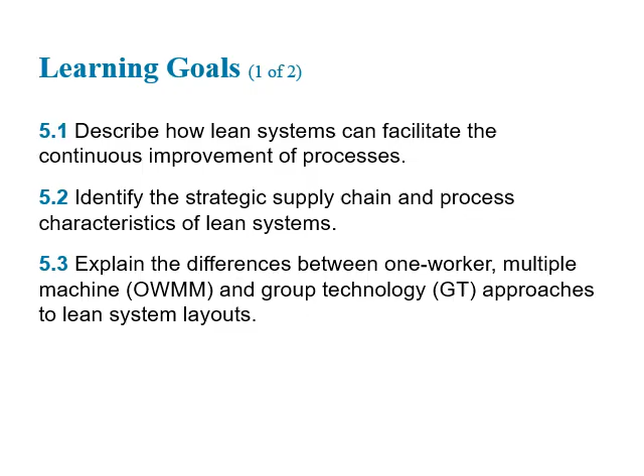It spans all of what you're doing in operations, everything from your strategic perspectives on customers and your way of organizing your shop floor, if there is a shop floor, your way of using employees to make improvements, and all the way down to things like order quantities and how you schedule and so on. A real common focus in lean is to eliminate waste, and waste reduction is a big issue. So anyway, let's jump into it.

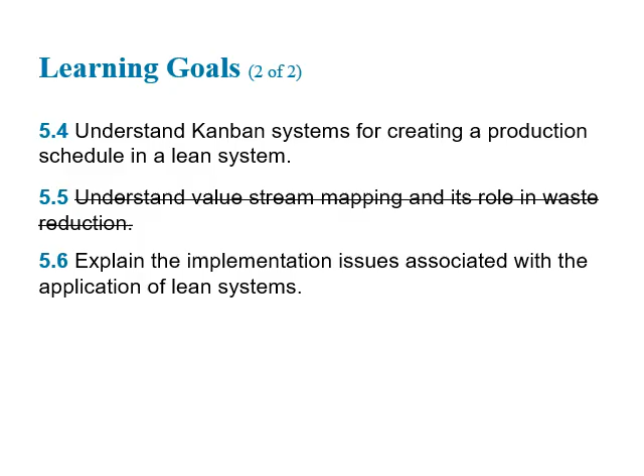Your book says that lean systems are operation systems that maximize value added by each of the company's activities by removing waste and delays from them. Delay would be a form of waste. So when we say value, we're really talking about something that a customer considers value.

When you go to the grocery store and you check out, it seems like the natural thing to do is for the person at the register to put the items that you bought in a bag. Well, if you can carry that without a bag and you don't value the bag, in fact, you think the bag is something you're going to have to deal with when you get home, then the approach of lean would be to not require you to take the bag, right? Because you don't think that's valuable.

In fact, if we found that none of our customers actually valued having a bag, then we would get rid of the whole aspect of having a bag for groceries. It's a simple, silly example, but you get the idea.

To give you another example, you go through the drive-thru at Chick-fil-A, it's summertime, you want a peach shake, or it's wintertime and you want, what do they have in the winter? Peppermint shake, something like that. Yeah, pretty good stuff. Anyway, in my experience, they're going to ask if I want a cherry.

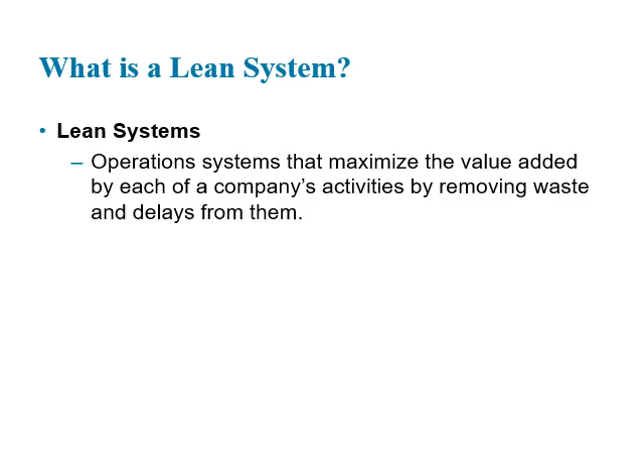Another thing that might have us thinking in terms of manufacturing is the fact that the whole idea of lean grew out of something called just-in-time production. Another word for just-in-time production is the Toyota production system, because that's where it came from, and that's the classic full-blown implementation of what JIT is, and it's the source of the lean philosophy and what we mean when we talk about lean systems.

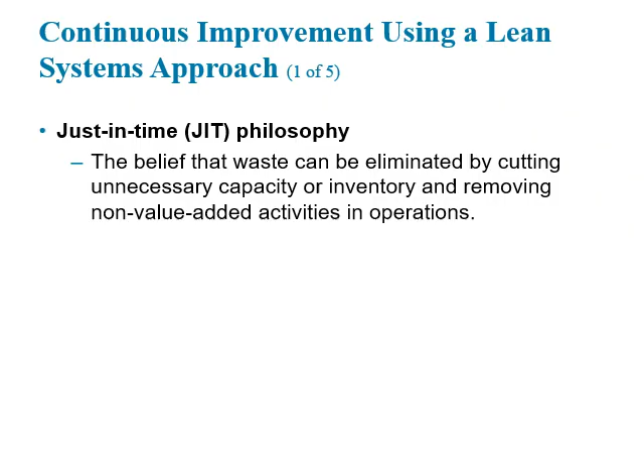So the JIT philosophy is basically the belief that waste can be eliminated by cutting unnecessary inventory or capacity and removing non-value added activities in operations. The folks at Toyota that developed this JIT approach and their colleagues in their supply chains identified 8 common types of waste that they would try to eliminate.

So the Japanese word for waste is muda. Muda is what we're trying to eliminate. First was overproduction. That's making components or parts or items before they're needed. What happens if we make something before it's needed is it sits around for a while and we don't know that we created problems.

So let's make it simple. We're a bakery and we're baking cakes for our customers, and they're going to show up through the week, and we bake on Sunday and they eat cakes through the week.

Well, sooner or later, a customer comes in and says, your icing was really kind of grainy, and as a result, I thought the cake was not really what we needed for our setting. Well, it's been days since you made the cake. You don't know why that icing is grainy. If you made cakes a few hours ahead of time, then you'd be very quickly able to respond.

And in the meantime, you've got 4 days worth of cakes still sitting there that you haven't sold, and you got to go figure out which of these have the grainy icing. Did they all have grainy icing? I have customers that are never going to come back. So overproduction.

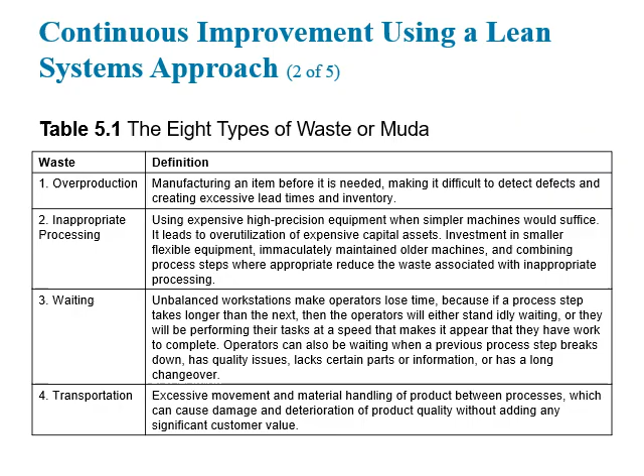Motion, needless motion. If your workers are going home at the end of the day just completely exhausted, it might be because the jobs are designed in such a way that they have to do a lot that they wouldn't need to be doing. So extra bending, stretching, reaching, lifting, walking, excessive motion could be a form of waste to be eliminated.

Inventory gets a lot of the attention. Like we've said, with overproduction, excess inventory hides problems on a shop floor. Plus, you got to pay to heat or cool the space where it is in a lot of cases. It can increase lead time just simply because it's in the way. And so there are a lot of problems associated with having too much inventory. Obviously, inventory is helpful. We're going to need some, but we can't have too much.

Defects are obviously a waste. If you spend time making something and it has no economic value, then you've wasted your time. Or if it has some economic value but requires further processing like rework to make it have that value, again, you've wasted your time. Or if because you make defects, you've got to have inspectors, that's a waste. So lots of ways to think about defects as wasteful.

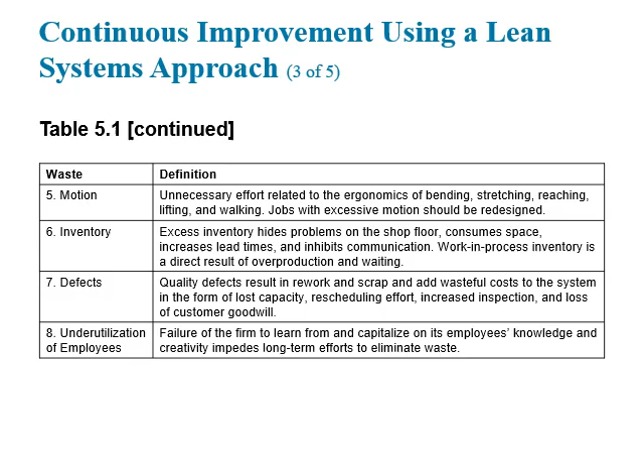A really common metaphor that we use when we're thinking about lean systems is the analogy of the river and the rocks, or the water and the rocks. In this analogy, the water is inventory. And like I said a few slides back, inventory can really help us to operate our systems. If we have a strike at a supplier and we have inventory, that's no problem at all.

If we have bad parts shipped from a supplier or made in our facilities and we have inventory, we can just put it aside, get a good one, and keep on going. So inventory is something that helps us to operate our system even when there are problems embedded in the system, disruptions of any kind, whether they're quality related or related to overt acts by employees or poor scheduling or whatever. All of those things can be accommodated if we have inventory, and we might still meet our schedules.

However, in this analogy, there's not just water, there are also rocks. And so the rocks are the disruptions, the kinds of things that we've been talking about. If you have a lot of inventory, you may have very little information about the rocks. You may never see the rocks. And as a result, you're unlikely to remove the rocks, which are obviously waste.

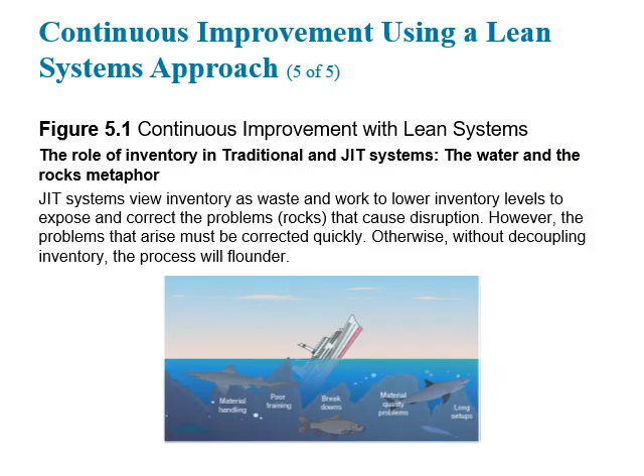So from a lean perspective, you don't want to have too much of the water, but just being realistic, you can have too little water and not get your boat down the river or not get your orders to customers. The good thing that inventory does for us is it decouples an operation from another operation, and thus it gives us insulation from problems that occur elsewhere. So we've got to have some inventory to protect us.

In the news these days, we frequently hear about situations where manufacturers are having to shut down. For example, in the early months of 2021, we see auto manufacturers with a shortage of chips having to shut down. And so, if they had enough inventory, perhaps they could continue to manufacture. There's this balance that we talk about. If we're going to be lean in regard to inventory, we're probably going to need to make some changes in terms of a lot of things, and that's why we call this lean systems, and we're looking at this from a systems perspective.

For example, if we're an auto manufacturer operating under this lean philosophy, and we have a plant where a unionized workforce is disgruntled, they decide to go on strike. Maybe what they made was steering wheels. We don't have any steering wheels. We don't need any of the other parts that go into the car, and the whole assembly line and the whole supply chain really gets shut down. So the employees have a lot of leverage there. Well, our approach to employees better be different than the normal adversarial approach that we might have seen in the past, or we're going to end up with a serious business problem whenever there's a minor labor problem.

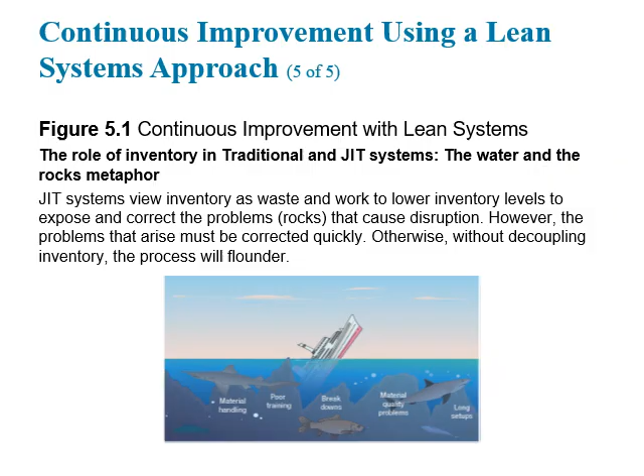Similarly, we might have a supplier that for some reason goes bankrupt. Well, we need to have a different approach than an adversarial approach to our suppliers. We need to have an approach that seeks the success of our suppliers, because we need reliable suppliers rather than having to carry inventory. So you see that this lean philosophy needs to be used and interpreted in a systematic way, in an ideal sense.

In addition to those better relationships with suppliers and employees and even potentially customers that are important in the lean system, in the just-in-time system, it's important to have small lot sizes so that you have less inventory, so that you're not doing this overproduction thing. And of course, you'll recall that a smaller lot size would require smaller setup times.

The economics that we explored when we were talking about lot sizing with the EOQ is legitimate. I mean, if it costs you a lot of money to set up to produce or to place an order, you can't be doing that every 2 hours or every hour. You need to order a good bit of inventory to justify that expense of placing the order or setting up to produce. So one important aspect of lean production and JIT systems is working to reduce setup times or setup costs.

And there's a gentleman who worked with Toyota and later the Japanese Ministry of Industry and Trade. His name was Shigeo Shingo, who made the claim in the 1960s that any setup in any industry, anywhere in the world, could be done in a matter of minutes. And so now there's this terminology called SMED, stands for Single Minute Exchange of Dies. And he's demonstrated that this is true.

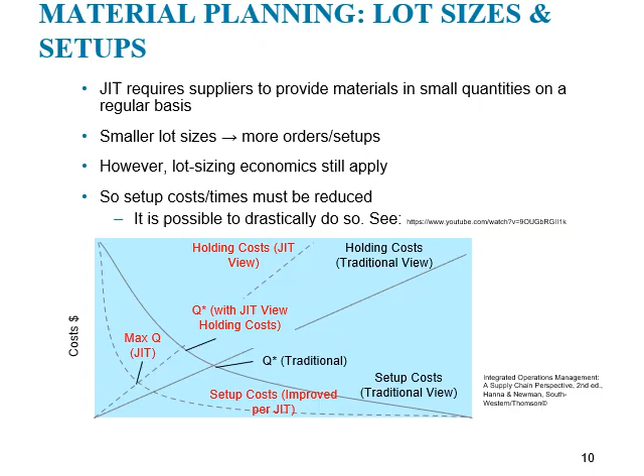So if we can do that, then we might be able to do something more like a pull method of workflow, where instead of making large batches of items and putting them on the shelf to be used as needed, we're able to see what was just recently used and replace that. So we'll talk later in this slideshow about a Kanban system that shows you how that would work in a lean scenario.

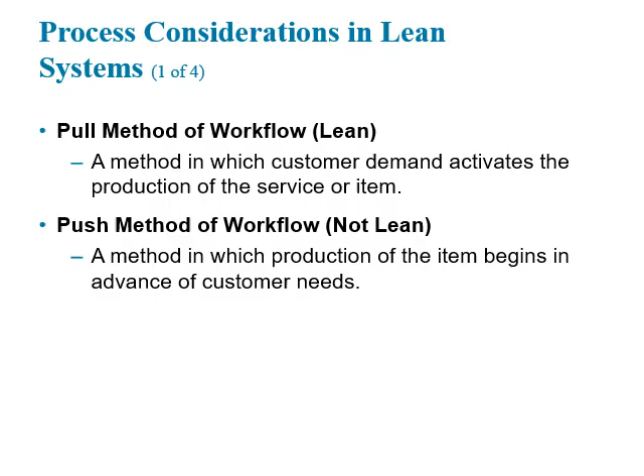Another systematic issue that's important is to make sure that quality issues are addressed at the source. So the Japanese word for this is jidoka. And what that means is when an operator or a machine senses that there's something wrong, maybe they see a defect, maybe when they're installing, let's say, a dashboard onto a car frame, it's supposed to click in place just naturally, and all of a sudden they realize they had to kind of force that to fit, and they didn't hear the click, it didn't feel right.

Then they have the opportunity to shut down the process, identify what the actual problem was, have people, because the process is shut down, come and help them solve the problem and make sure it doesn't happen again. Might even design a poka-yoke, which is a mistake-proofing device to ensure that the problem doesn't occur again. Something like that. We'll find a countermeasure that's effective in some way.

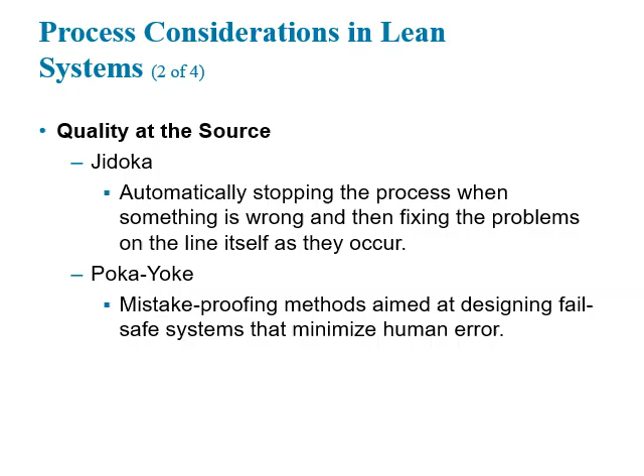So then, really what we're looking for in terms of the system from a production perspective is having uniform workstation loads operating essentially at takt time, as we described on a previous slide. And so, the idea is that the load and volume and product mix is something that is a recurring thing that's stable and even across the entire system.

It allows us to potentially even have something that we refer to as mixed model assembly, in which case, we end up with a single assembly line producing multiple items based on materials being fed from supply workstations and from external suppliers in the order in which they're needed for the assembly that is to be done next. And so that's sort of the idea that we're working toward.

And again, we don't want this unnecessary processing. So to the extent we can, we use standardized components, and if there's an off-the-shelf available component that's going to work just fine, why should we design a similar item for a specific unique application? And why should we have a special fancy machine if there's a machine off the shelf that'll work fine for our purposes? So we're trying to keep things as simple and repetitive as we possibly can.

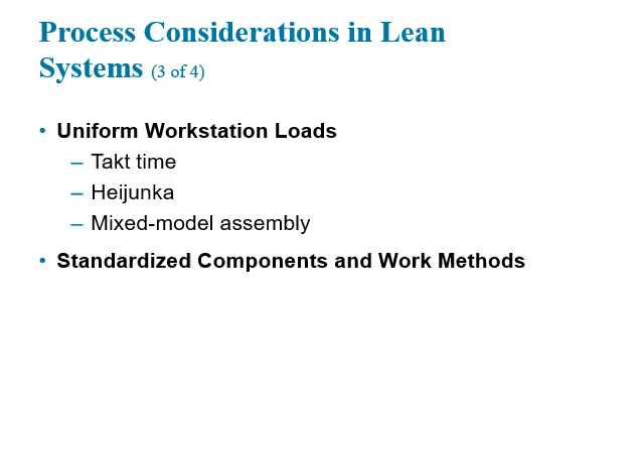5S, making sure that there's a place for everything. Everything's in its place. The workplace is clean and orderly and maintained in that regard. It's a very positive thing, very helpful in a lean system. It eliminates a lot of waste associated with disorganization.

In a lean system, automation is actually seen as a positive thing. I know there's a lot of negative baggage associated with it. If we're thinking about automation in our country, a lot of times we're thinking about losing jobs. But the other way to think about that is if there's a job a machine can do, why would we ask a person to do that? Wouldn't it be better to let the machine do that and use our employees' creativity to improve the way that we do things?

So, there's this view that we may be underutilizing, again, our employees if what we're doing is we're just paying them to do some routine task repetitively that a machine could obviously do with less fatigue and eventually fewer defects and fewer errors.

Finally, it's important for us to use something called total preventive maintenance, and actually we might even say total productive maintenance. So the idea is that all workers would have responsibility to do the basic maintenance on their equipment, but we would like to ensure that preventive maintenance is done at regular intervals, or even productive maintenance. So a machine may not be at a point where we need to do preventive maintenance to keep it from breaking down, but it might be at a point where we could perform some maintenance and it would be more productive.

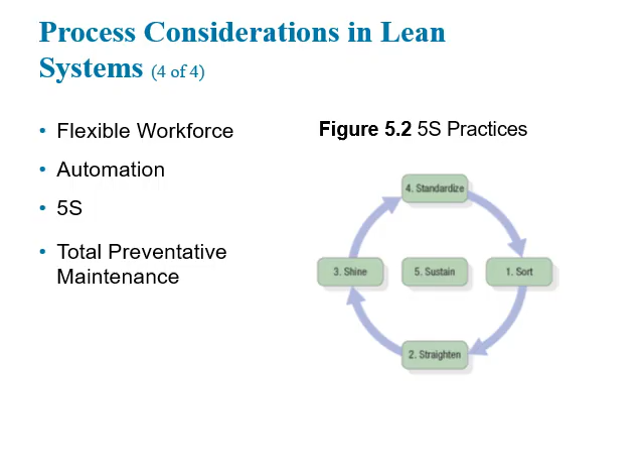And so, those are important considerations that we might think about as we consider the sort of systematic aspects of lean that will enable us to lower the water level and not have to worry as much about the rocks.

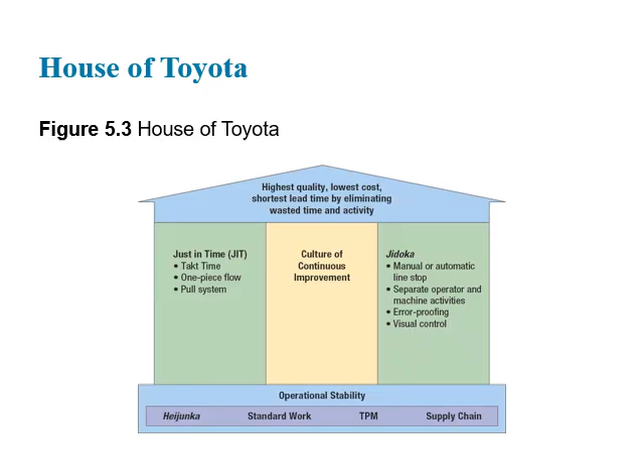So the idea of group technology is something that goes along with cellular manufacturing. And what we like to do a lot of times in order to have more flexible workers is create production cells that produce a variety of parts, but using a uniform routing. And in order to do that, we need to design the product in such a way that it can be made in the cell, and that's what group technology is talking about.

So instead of having a job shop with large lead times and large batch sizes, what we can do is we can create a cell that produces a variety of things using the same resources, but produces them in small quantities because we've designed the parts in such a way that the cell can make them. And we've designed the cell in such a way that it can make this variety of parts. Then we have a lot of flexibility.

If the cell's really busy, maybe we put 2 workers in the cell. Or if the cell's not as busy, maybe we have 1 worker and he can control all of the equipment at the same time. So this shape, the U shape, is very common when we start thinking about that manufacturing approach that we would call cellular manufacturing. And the underlying product design approach is called group technology.

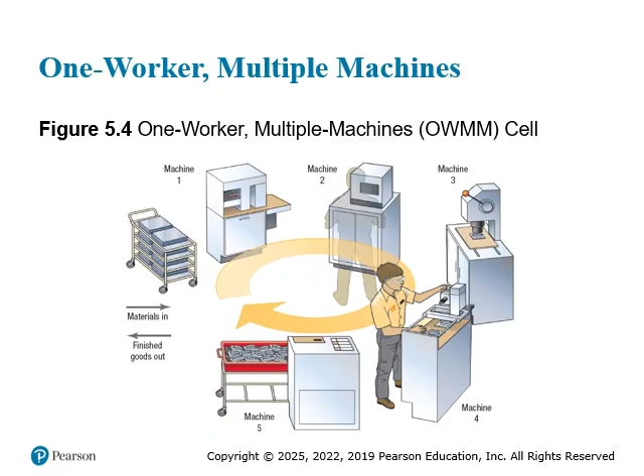Instead of having work centers like lathing, milling, drilling, grinding, and assembly completely separated, what we could do is create a job cell that has all of those resources in the cell. And that way it's capable of making the entire mix of items that are in the product group that we've designed.

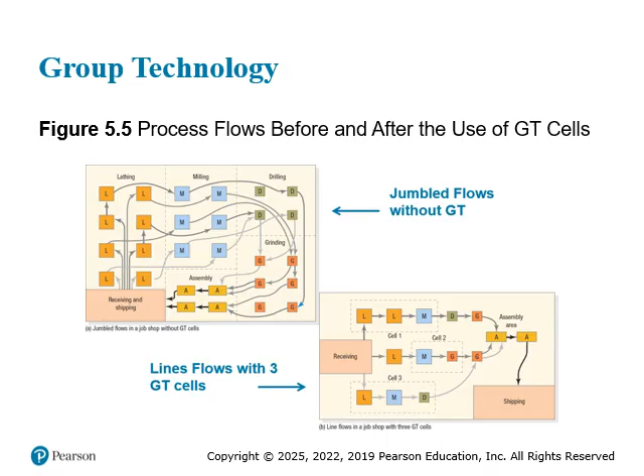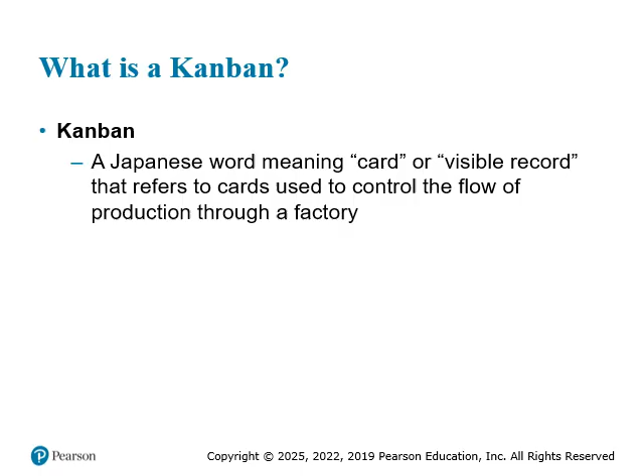Now, the last topic in this chapter we'd like to talk about is the Kanban system. Kanban is a Japanese word. It means card, like you're playing a game of rummy, you're using cards, you're using Kanbans. Another way to think about it is it's a visible record that can be used to control the flow of materials through a facility. I think it's also a Chinese word that sort of has this notion of being a poster that conveys information, something like that. Obviously, it came out of Japanese in this context.

So we could have one-card Kanban systems, two-card Kanban systems. There are a variety of different approaches. But basically, what the Kanban does is it provides authorization for someone to do something. So an empty container could be a Kanban. So here you see assembly line 1 and 2, and you see a fabrication cell. So if the assembly line sent an empty container to the fabrication cell, that could be a single card Kanban that says, fill this back up. It would need to have on the container what goes in there and how much goes in there. So the fabrication cell would simply replace what had been used by the assembly line.

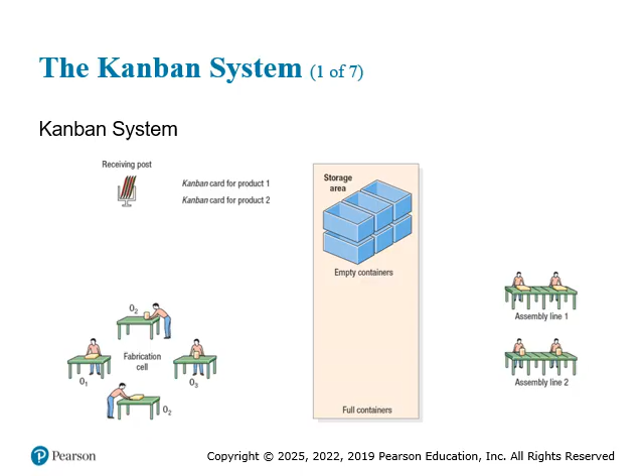It's also possible to have disposable containers like cardboard boxes or something like that, and for a card to be pulled off of the disposable container by the assembly line. And then the card goes back to the fabrication cell, indicating that they need to replace what was used by the assembly line. So the container doesn't come back in that case. The card makes its way back. You'll see it working in the next few slides.

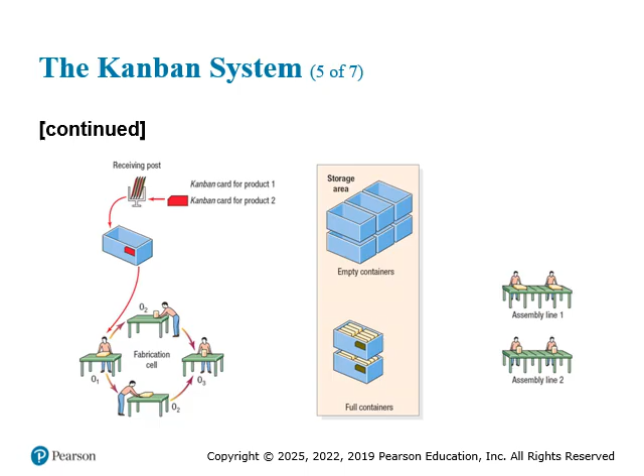So in this scenario, the assembly line has used some material. It's sent back empty bins, and the cards have been taken off the bin, put into a receiving post or an inbox at the workstation. And so they pick up a card, put it on a container, and go to work. They make what the card authorizes them to make, put it in their outbound stock location, and of course then it gets used by workers at the assembly operation. And we pick another card and make whatever it is that authorizes us to make. It gets used at the other assembly operation.

So essentially what's happening is these containers and cards are just making the loop from the place where inventory of a particular description is used back to the place where the inventory is fabricated. And so basically, simple rules are going to operate it. You don't make things unless you have a free card that's authorizing you to make them. You don't use things that are not associated with the card that you're authorized to withdraw, or the container that you're authorized to withdraw from. And always when you withdraw inventory, you send a card back.

So you might ask, well, who decides how much of what to make when? And the answer is, well, the cards really communicate how much to make when. But we do kind of have to think about how many containers or cards of a particular type do we need, and how many units should be held in each container. So the number of units is really a lot size thing, and the number of containers is really a reorder point. And so essentially what's going on is something like a Q model that we talked about in prior classes, where the reorder point is basically the point at which we empty a container. And so you could say that a reorder point model is what's being applied, only instead of using it with large quantities, we're using it with very, very small quantities.

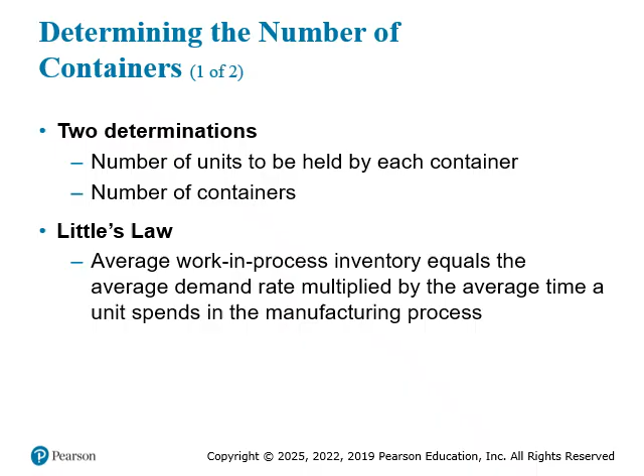So in other words, it's the time from when a withdrawing workstation sends back a card until it receives the replacement. And you could say d bar times w bar plus p bar is like d bar times L, which we had in a reorder point model. And you'll notice that's multiplied by 1 plus alpha. So the 1, d bar times L bar times 1, that's like expected demand during lead time.

D bar times L times alpha, well, alpha is a safety stock factor. It's a policy variable. Basically, that's how many extra cards, how many extra units we're going to have on hand when we place our order.

And so if we simply divide that formula we've been talking about by C on both sides, that'll tell us the number of kanbans that we need to have in a particular loop in order to ensure that when we withdraw some inventory, it'll be replaced with a degree of confidence that we're satisfied with before we have to withdraw some more.

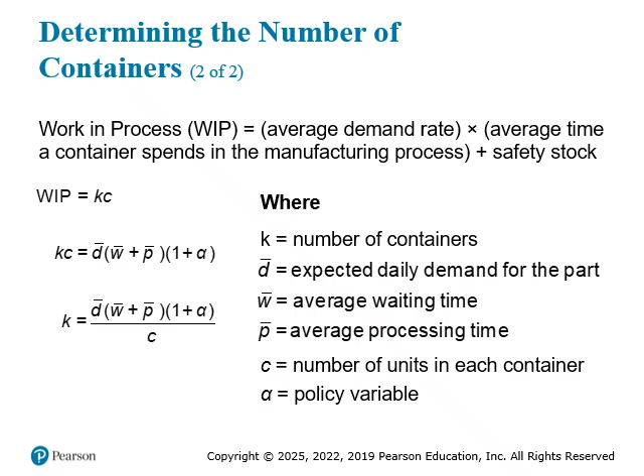Here's an example. Westerville Auto Parts produces rocker arm assemblies. A container of parts spends 0.02 days in processing. It might be more common to convert that to minutes. And 0.08 days in material handling and waiting. Again, could be minutes. Daily demand for the product is 2,000 units. So we could make that minute by minute demand or hour by hour. Key thing is to have units consistent.

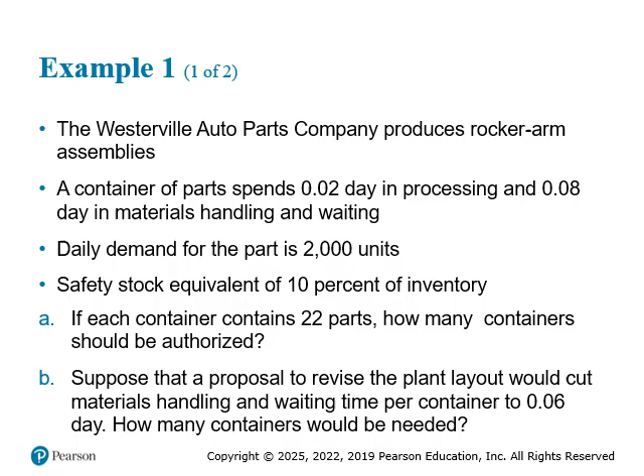We want 10% to be our safety stock factor. So if each container contains 22 parts, how many containers should be authorized? And then they want to know, suppose that a proposal to revise the plant layout could cut materials handling and waiting time per container by, in this case, 25%. So how many containers would be needed? So it's pretty straightforward. Let's look at it on the next slide. Of course, if you have the numbers, the calculations are pretty straightforward.

Here, we've got 2,000 is the daily demand rate being multiplied by the wait and production times, 0.08 and 0.02 days added. And that, of course, is multiplied by 1 plus 0.1, which is the 1 for the expected demand during lead time, plus 0.1, which is the safety stock factor. Divided by 22 units in a container tells you need 10 containers. So you have 10 containers going in the loop based on that information.

It's the same arithmetic if we reduce the waiting time to 0.06 days. So, in that case, we do the same arithmetic, we end up with 8 containers is what's needed on the loop.

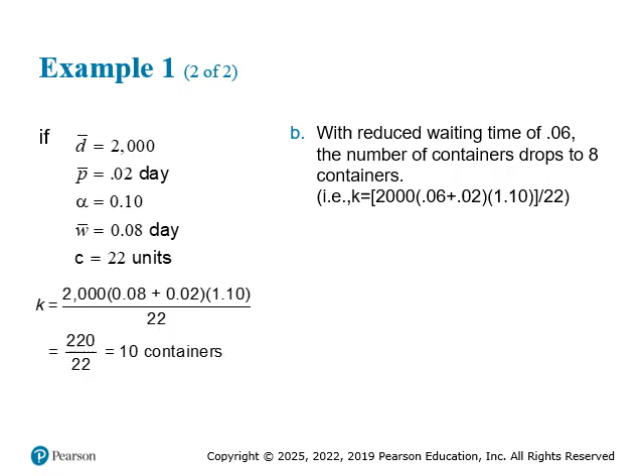We alluded to this earlier in the description of Kanban, but the container itself can work as the signaling device, and we can even have situations if the using workstation is very close to the producing workstation where we don't even use containers, but just designate a physical space as the signal. So if the physical space doesn't have any inventory, production's authorized. If this physical space has inventory, production is not authorized. So a painted square on the floor is an easy example of that kind of thing.

I'll just say your text does have content in it related to value stream mapping. That's a very useful tool. It's not necessarily so associated with lean production as just a valuable tool for understanding processes. It's not something that's in the scope of what we want to do in this chapter, so we'll skip over that part of the chapter, and the rest of what's in this slideshow is simply end of chapter solved problems that I put here just for your convenience, so you don't have to go digging through the book in case you're just looking for an example.